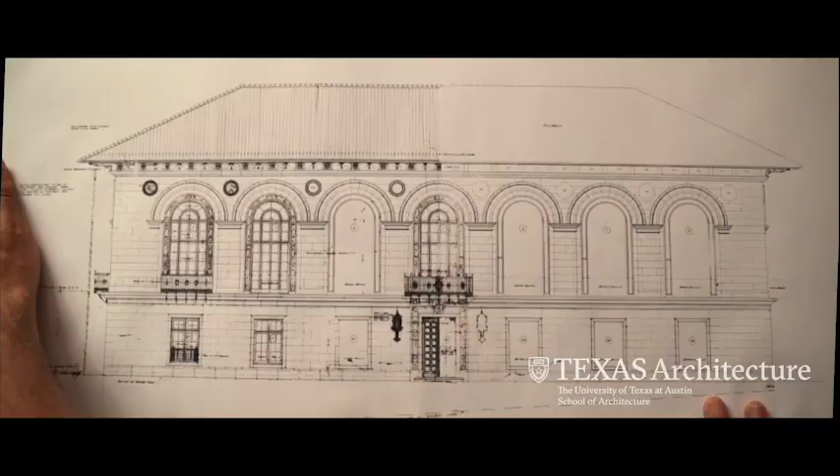So there is a dictionary definition of architecture that I'm very interested in. You know how I've got a huge, thick Webster's Collegiate Dictionary in my office, a real relic. When you flip to architecture and read the definitions, of course at the beginning it's talking about architecture as buildings and the kind of thing we understand architecture to be mostly. But if you file down to the sixth definition of architecture in that dictionary, it's a very interesting, maybe different notion of what architecture is.

That sixth definition says architecture is the underlying structure of anything. It gives several examples, like speaking of the architecture of a political campaign. So if we're looking at a political campaign and trying to understand how they strategized, we might look for the underlying structure of that campaign, and we would call it the architecture of that political campaign. Or we might say this is the underlying structure of this novel — this is how the narrative comes out, the beginning, the middle, the end, or it's very postmodern and episodic. But whatever that underlying structure is, that is sometimes referred to as the architecture of the novel.

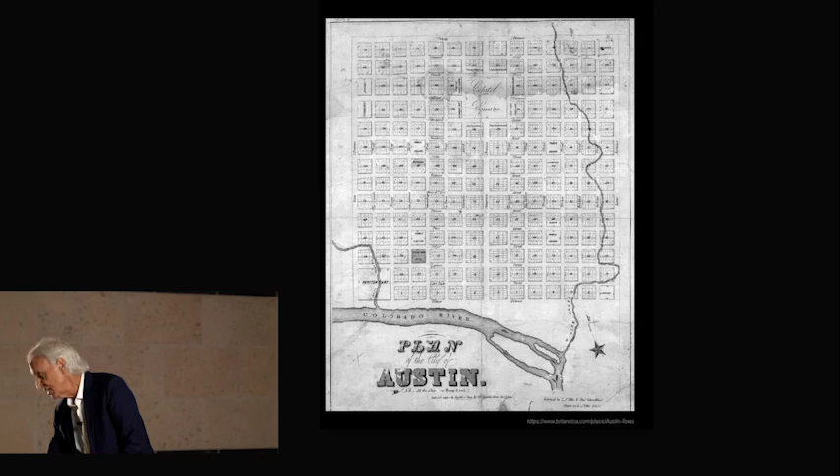What we're looking at today are two very specific grids as underlying structures with very specific applications to very specific problems. The first of these is actually our hometown here, Austin, Texas. A grid was laid out in Austin in 1839, called the Waller Grid, after Edwin Waller, the architect engineer who laid out the city then.

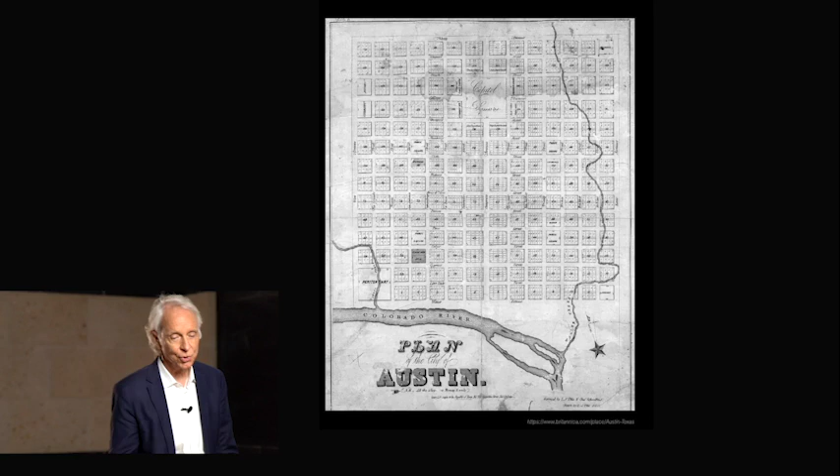Actually, the site for Austin had been selected on the basis of geography. Texas had its first capital in 1836 in Washington on the Brazos. Relatively soon after that, Sam Houston became president of the Republic of Texas, and they moved the capital to a little village called Harrisburg. A couple of brothers named Harris had established this village. They told Sam Houston, if you will move the capital of Texas to our little burg, we'll rename it Houston in your honor. He thought, sounds good. So they renamed it Houston, and for a while the capital was there. Then when he was no longer president and Mirabeau Lamar became president, he said, we don't need that vanity exercise.

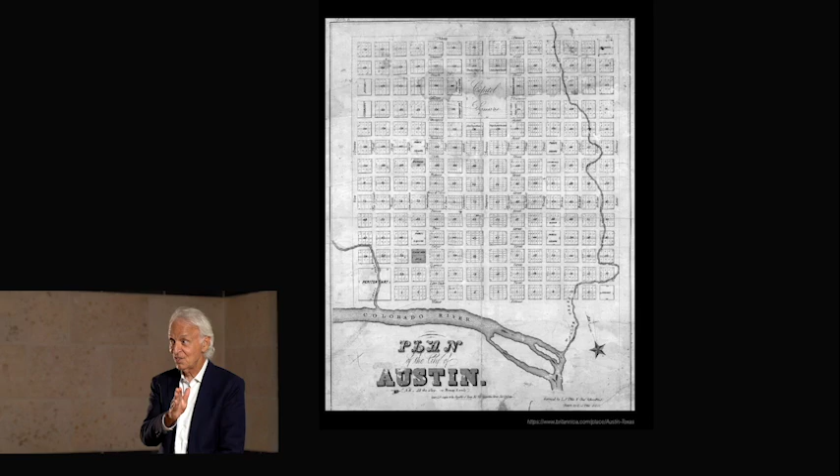Houston was deemed to not be a good location for the capital. There was a tropical climate there, high humidity, very hot. They were worried about tropical diseases like malaria. So they decided maybe they really didn't want to be in Houston. There also was a desire to put the capital more centrally in Texas. They still had the Indians coming in from the west and threatening this new republic, and they thought if the capital were a little further west, that could help stave them off. There still were the Mexicans coming up from the south, and if the capital were a little farther over, they might be able to counterbalance that some.

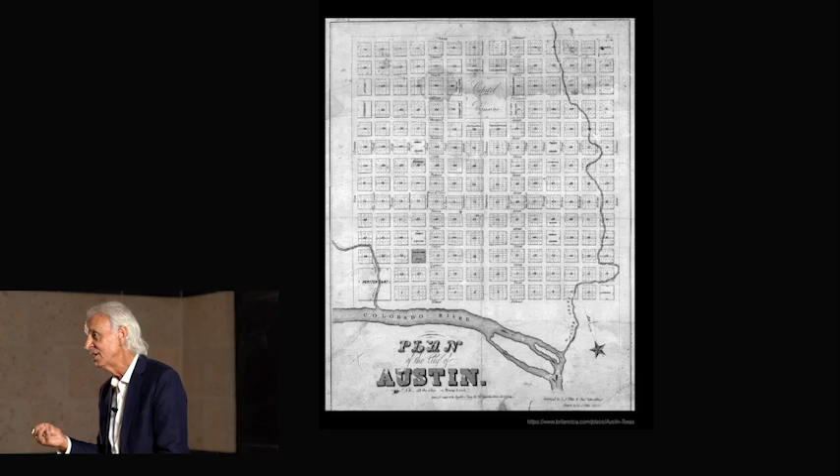So Mirabeau Lamar sent an expedition up the Colorado River in central Texas to look for a site for the new capital city of the Republic of Texas. As they came up that river, they saw a slow rise of land coming up from the river, and as it rose, there was a hill, a very distinctive hill quite higher than everything else around it. As they came up the river, they thought, wow, perfect - that's where the Capitol building sits. And there will be a long street connecting it to the river, the perfect site for a capital city. Symmetry was very much a part of it here.

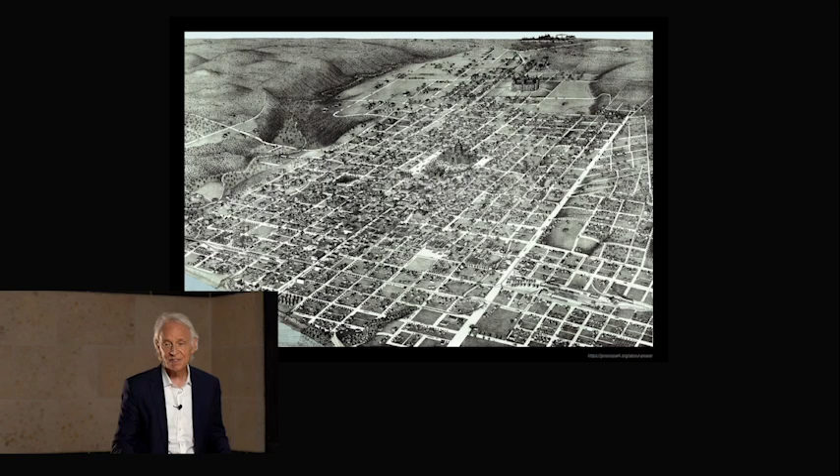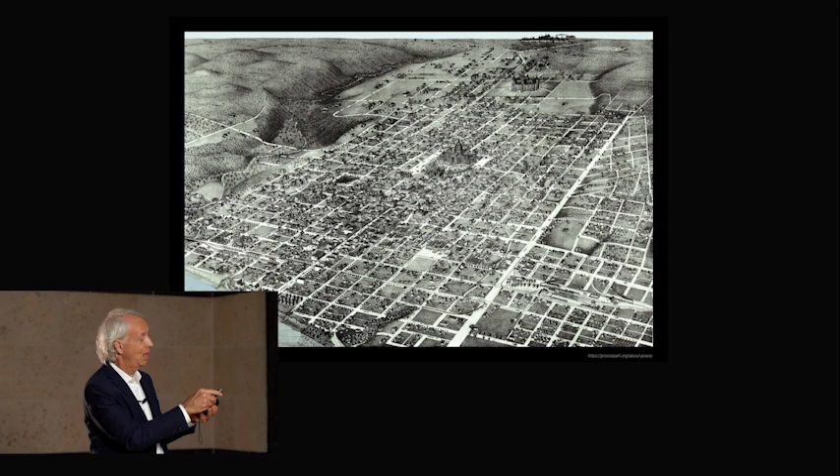There was a bluff on one side to the east, and a bluff on the other side to the west. A creek ran through the base of that bluff that's now Waller Creek, and another creek ran through the base of the other bluff that's now Shoal Creek. So you had the slow rise up to the hill, the framing of the bluffs on either side, and the creeks on either side, and that geographically said to them, wow, that's a perfect place for a capital city. So they laid down the grid here, 14 blocks by 14 blocks, and nestled it into that geography. This is an underlying structure that's responding to geography - the slow slope, the hill, the bluffs, the creeks.

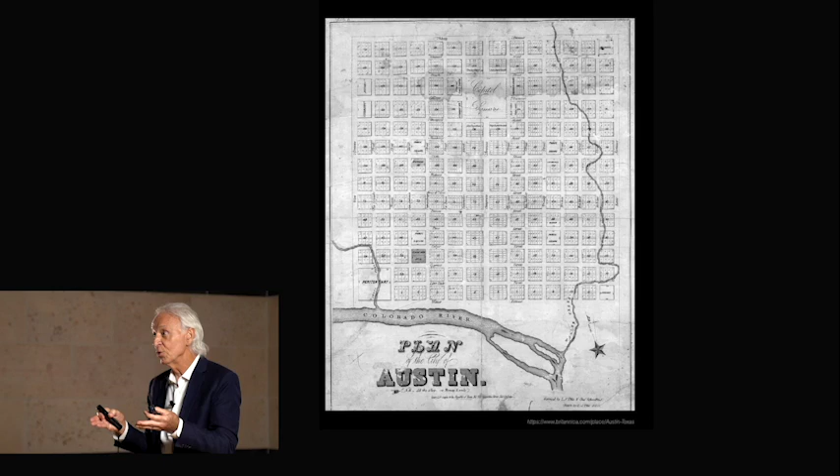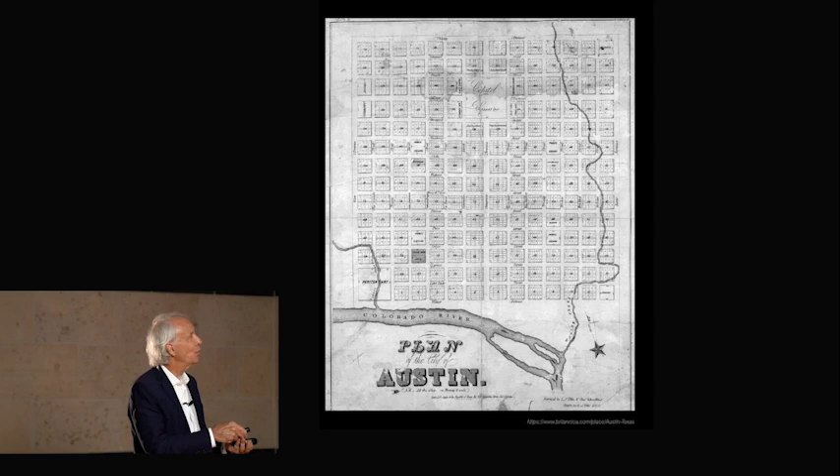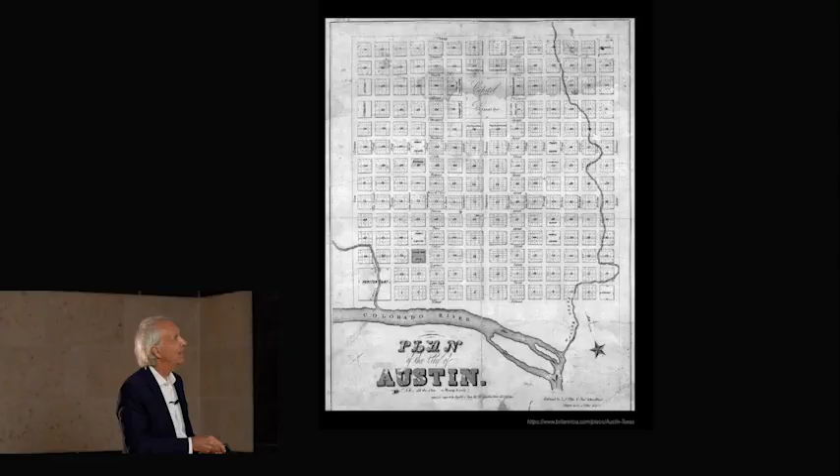Evidence of that: when they named the streets, they named the east-west streets for trees in Texas, geographical features. So you get Bodark, Live Oak, Cypress, and Pecan, all streets in the east-west direction. Later on, they became numbered streets, as they are today. The streets in the north-south direction were named after the rivers of Texas, in the geographical sequence of the rivers as you move from east to west across Texas.

So this was East Avenue right there. Then came Sabine and Neches and Trinity, and then San Jacinto and Brazos, and Congress Avenue became that central spine going up to the Capitol building. And then the rivers continued on the other side, and it was Colorado and Lavaca and Guadalupe, San Antonio, Nueces, Rio Grande. Rio Grande's the westernmost river, like Sabine's the easternmost river, and then West Avenue.

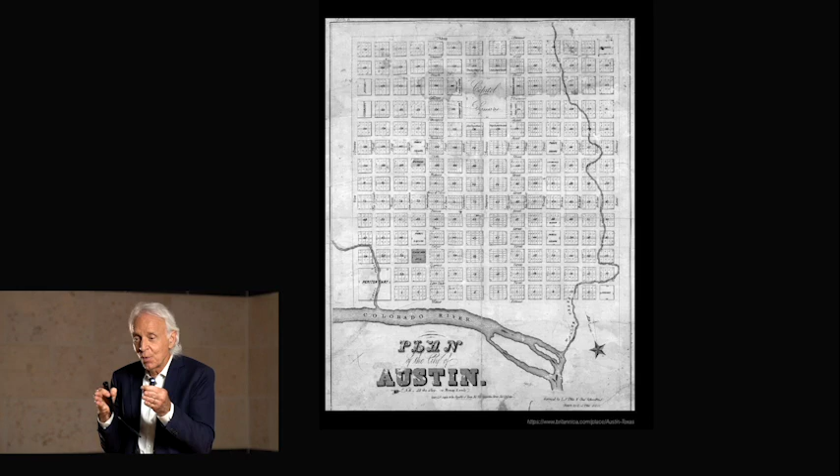So again, geography is the provocation, and they're creating an underlying structure for the city that's very responsive to the geography of the site and based very much in the geography of Texas. And then from that began to tell you exactly where other design decisions would happen.

So that major street leading up to the hill, Congress Avenue, that begins to be clustered with all of the commercial buildings. So they're lining up along Congress Avenue. 6th Street was the highway that went out to Bastrop in the east and went to Marble Falls in the west. It became a secondary commercial street.

There were 4 open parks there and there and there and there, and they began to have a completely different use, and the things around them were shaped by those equally spaced 4 parks that are there. Those 3 of the 4 are still there. That's Brush Square, Republic Square, that still exist in downtown.

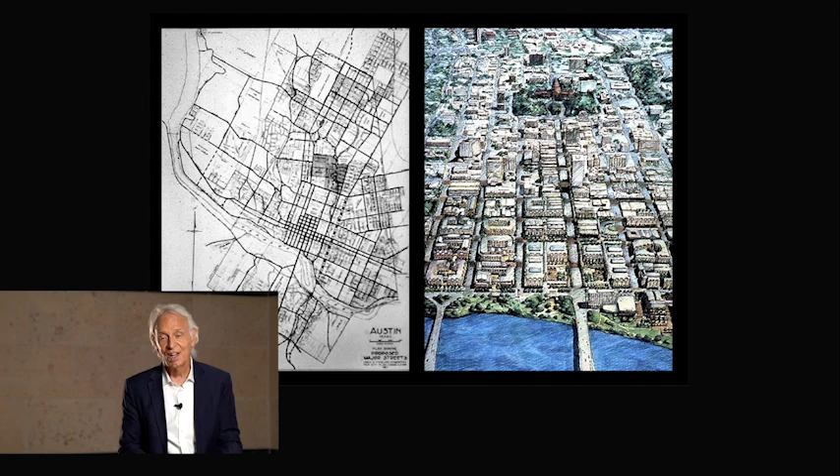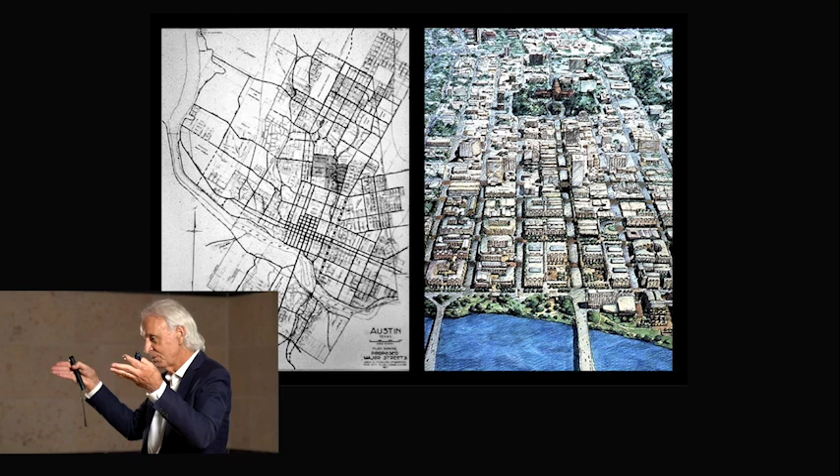Now, the point of all of this is that first you take a notion of geography. This has powerful geography. We need to find an underlying structure that organizes that geography. You then find a particular kind of grid, not one with the courthouse in the center and equal on all sides. No, it's gestural to identify this valley between 2 creeks and the hill and Congress Avenue, and a particular grid is laid out there.

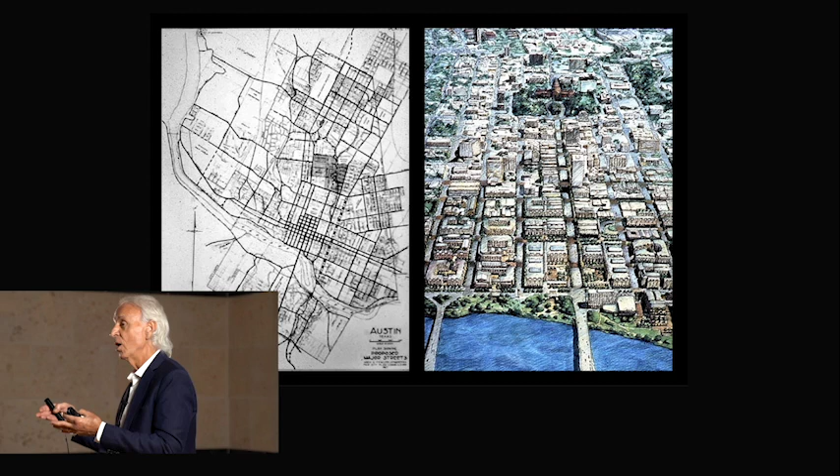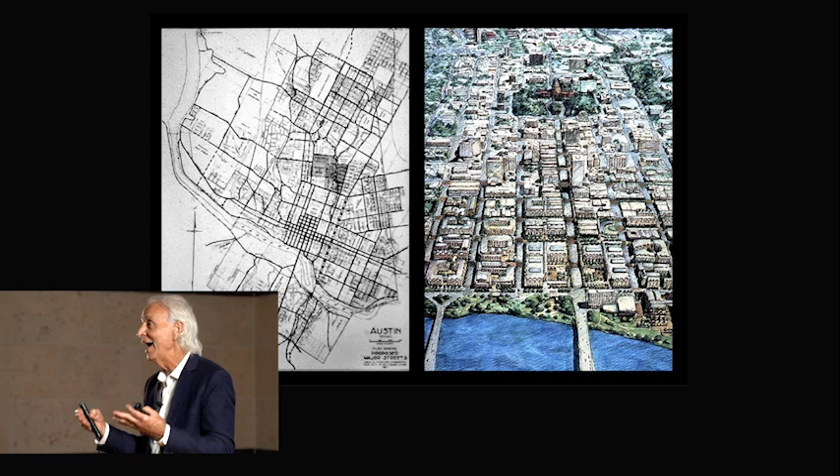And then all the decisions about where commercial buildings go, where residential buildings go, where marketplaces go, where institutional buildings go, where iconic buildings go, they begin to be sorted out according to that underlying structure. And to this day, when many of you came from another city to Austin, it was that underlying structure that made it easy to understand how you move around in this city.

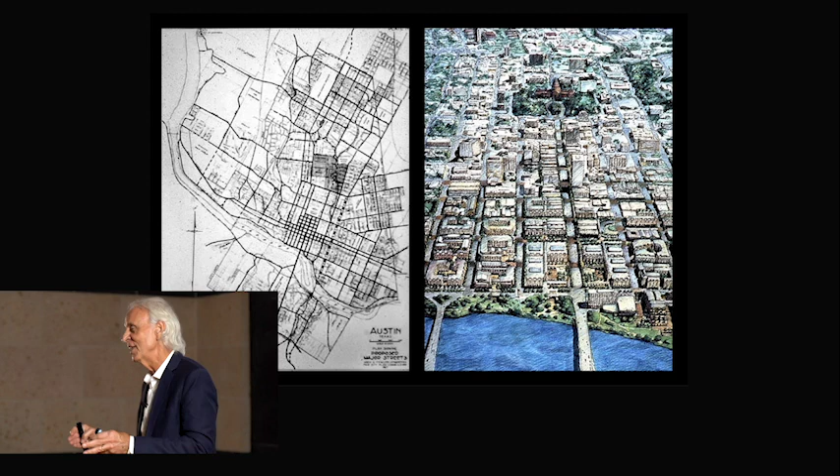How do I get down to 6th Street? 6th Street has continued to be that iconic kind of central feature in the city because of its role in the underlying structure from the beginning. Congress Avenue the same way.

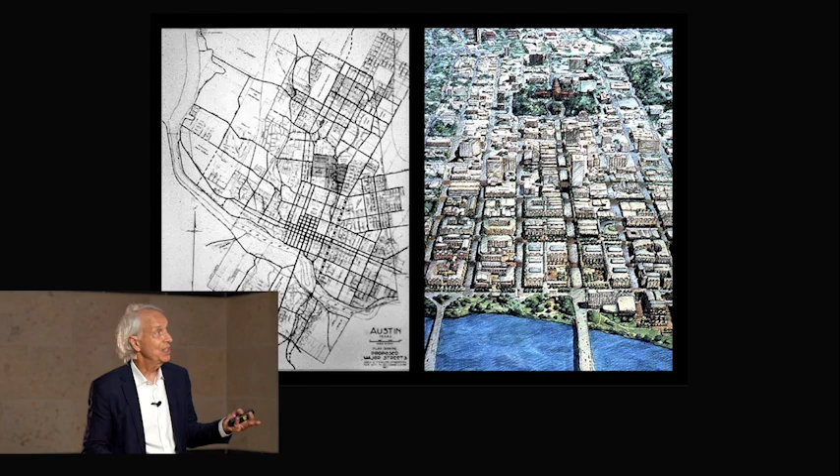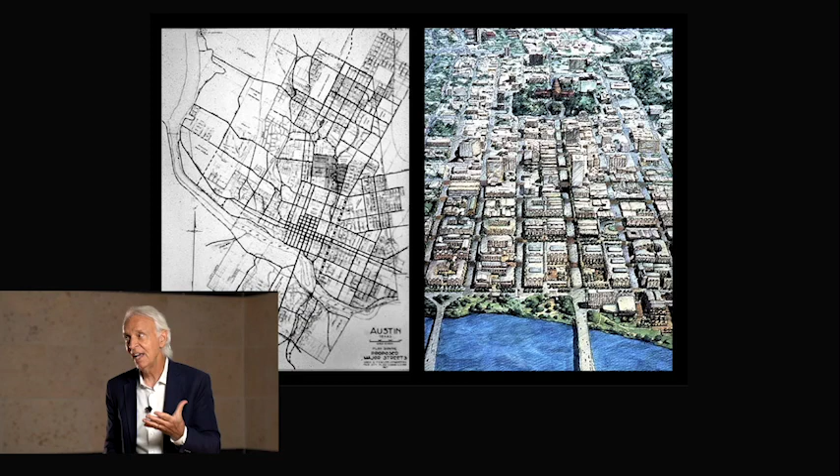So to this day, now we have many different grids. That's that original grid right there. There's the grid of the university that got applied later, the grid of Hyde Park, which we see up here. Many different neighborhoods responding to different exigencies around. But the nature of the city today is very much based on that underlying structure that was applied in the grid way back in the 1830s.

Now, just to show how this works in another instance, we're going to talk for a minute about the city of Savannah in Georgia. And it's a grid, but it's a very different provocation for that grid and a very different underlying structure that came of it.

So the city of Savannah was founded by a guy named James Oglethorpe. And his goal was—he was an Englishman, and he was very sympathetic to poor people in England who, when they couldn't pay their bills, they threw them in jail. Well, you can never earn money to pay your bills if you're in jail.

So there would be people sentenced to jail because of non-payment of their bills, and their families were destined to be destitute forever. So he said, this is a ridiculous system. These are not bad people, they just couldn't pay their bills.

So he had the idea of taking these people out of the jails and taking them to the colonies in America, and setting up a colony there for people who were in jail only because they couldn't pay their bills, letting them have a fresh start, make some money, pay their bills back in England, and set up a new culture in the United States.

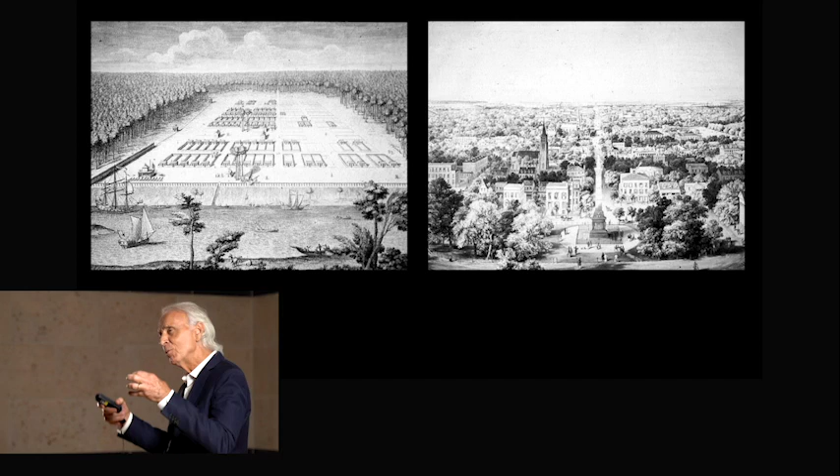But there was a very strong social provocation: how can I make an underlying structure of this community that will help these people get on their feet, help them form a sense of community, have the ability for upward mobility, the aspiration to do better, to make a better life for myself and my family. So he's trying to create an underlying structure for the city that will encourage a strong social sense of community and a sense of aspiration for the people there.

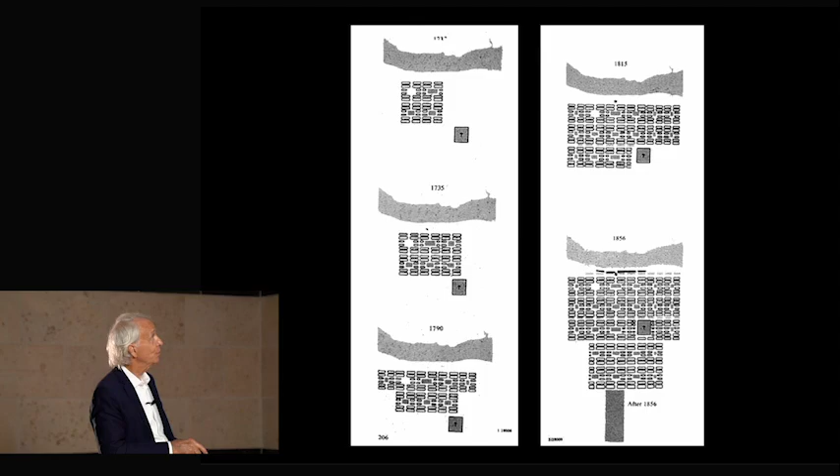So he chooses a very different grid, based on what's called a ward. One of those little squares is a ward, and in the center of the ward is a little park space.

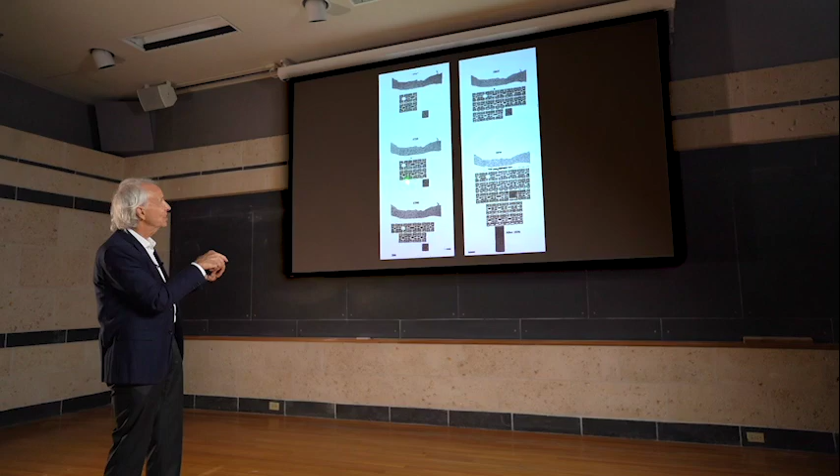Initially, in 1733, there were only 4 of those wards. Then there got to be 6, then 8, and they grew and grew. The idea was as the city got bigger and bigger, it would add more and more wards, but each ward, each little neighborhood community, would have this central focus and park as a way of having an identity as a social unit together.

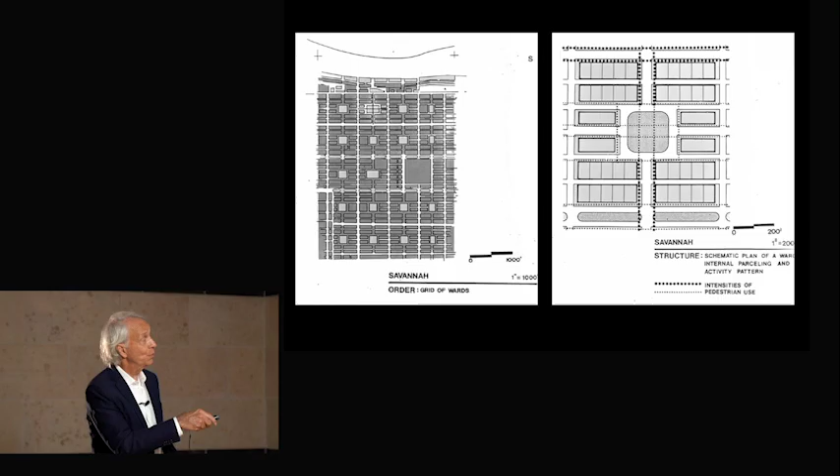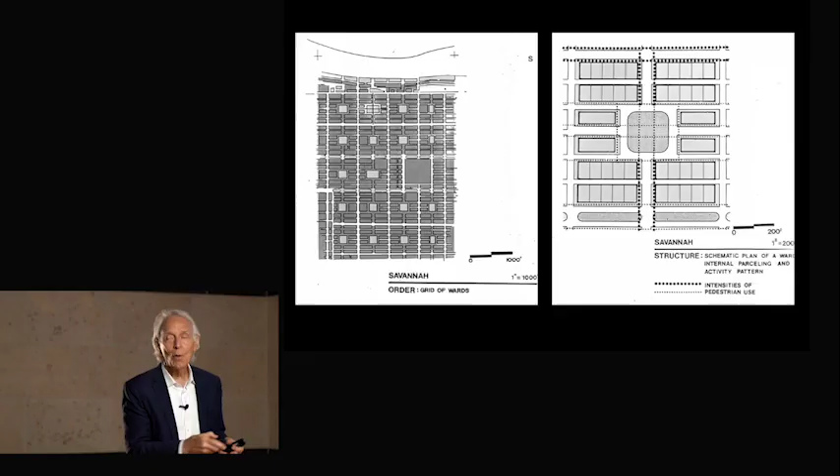That's what a ward looked like. It had the park in the center, and 4 blocks right here called trustee blocks. Those were meant for something like a church, a civic institution like a bank, or a leading citizen's home. So if you really got successful, you might be able to afford to live on one of those trustee blocks - those were kind of special blocks.

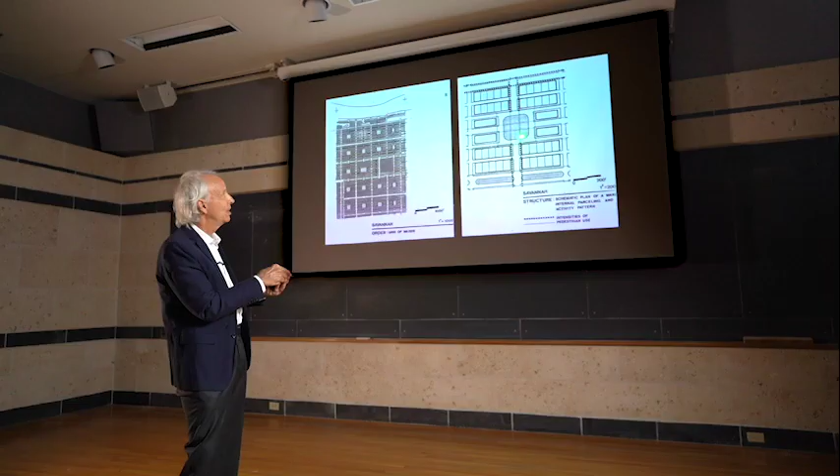Then there would be the more ordinary fabric of everyday people's homes in the other blocks around, and that would be a ward or small community centered on that park.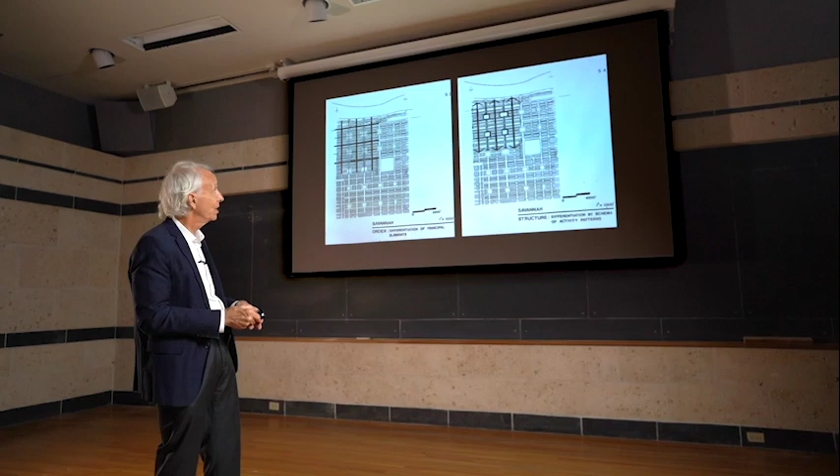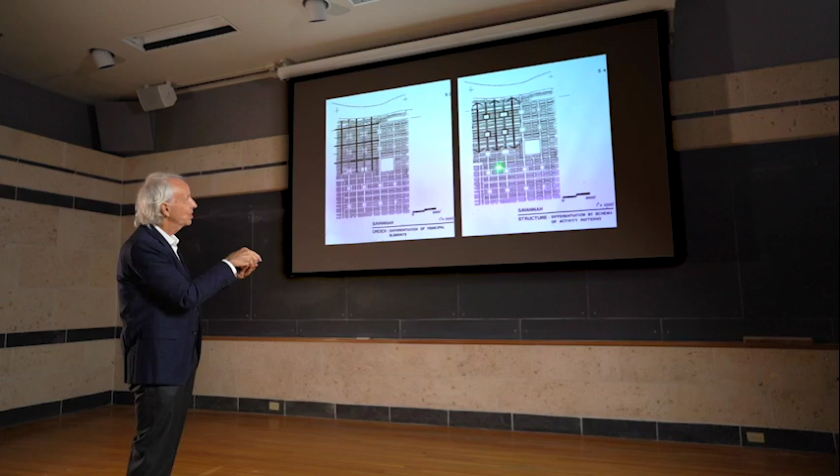By the way the streets are laid out, in between the wards you can go continuously through the city. But in the center of the ward, the park interrupts the street, so you get more pedestrian movement through here, and more efficient vehicular movement on the streets around the ward.

So those trustee blocks became the place for the more iconic or landmark buildings in the city, while on the other streets and the rest of the fabric it would be more ordinary homes for regular citizens. There was always that sense of aspiration - if I get successful, I could move to a trustee block, I could have one of those badass landmark homes on one of those blocks.

Each ward had the ability to include someone who was successful, maybe a wealthier person, with plenty of places for middle-class people, and always places for affordable housing for people of lower income. So within a ward you would get the whole microcosm of people at the upper rung of financial success and people at a more modest level.

This built into Savannah this idea of diverse communities able to be in close proximity to each other, unified by this little park at the heart of it. In fact, they brought in all these people who had not been successful in England and had been put in jail for their debts, brought them over, and it was a very successful community economically.

But again, the underlying structure of that city was based on this social purpose, and the grid was very much a result of that social purpose, and then a provocation for the way people lived, built buildings, and developed their city as a whole.